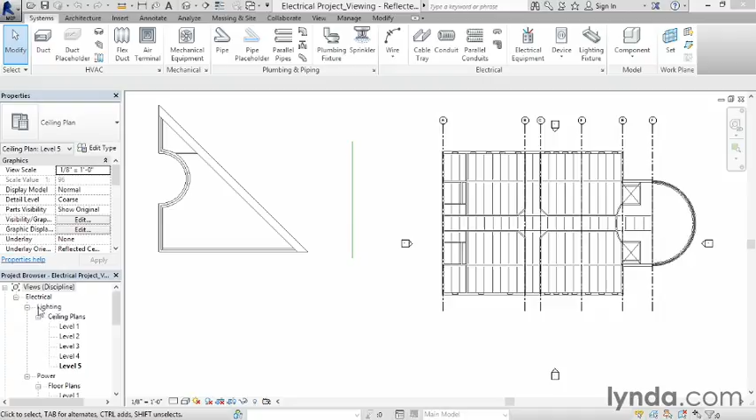If we simply don't want to see lighting fixtures in a floor plan, wouldn't it be great to just uncheck electrical fixtures in a list somewhere and have them simply go away, as opposed to some convoluted layering system? Now, let's take a look at how to control the visibility graphics of a view. The first thing I'd like to do is pick on ceiling plans. So let's go to Electrical, Lighting, Ceiling Plans. Let's go down to Level 1.

If you zoom in on an area, notice that you can see the reflected ceiling plan. This isn't really visibility graphics. This is because we told Revit to set it up as a view as a ceiling plan. What we want to do, however, is control the visibility state, meaning we don't want to see any power, we don't want to see any ductwork, we don't want to see any cable tray or pipes. So to do this, we want to control the visibility graphics of the view.

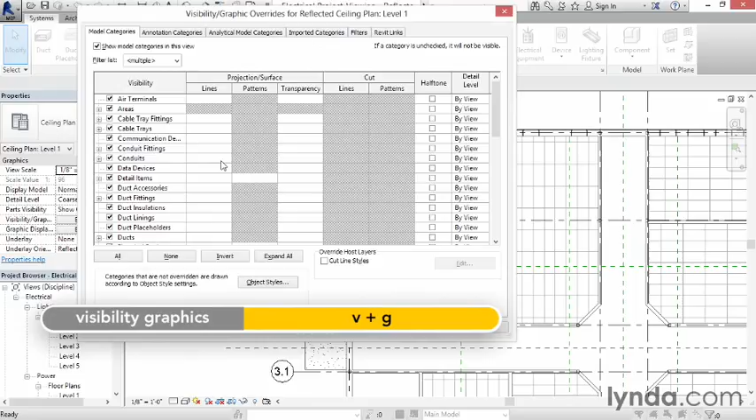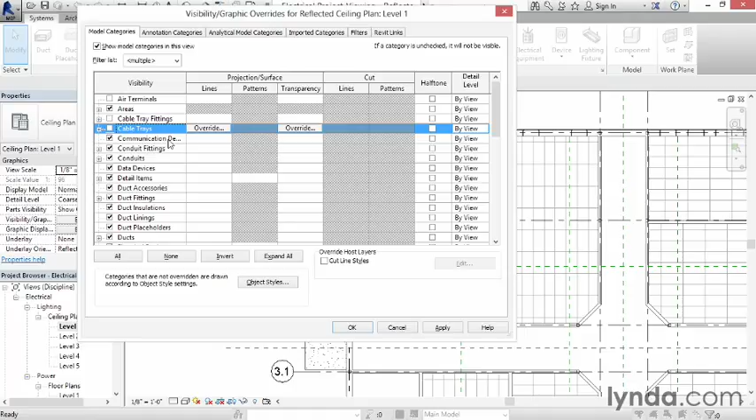Type in VG. Now, under model categories, let's make sure in our filter list, we click the drop down, and make sure mechanical, electrical, and piping are all selected. Now, let's just start unchecking items we do not want to see. Don't want to see air terminals, cable tray fittings. We'll keep communication devices. We'll get rid of conduits. We'll keep data devices. Get rid of anything that pertains to ducts. We'll keep electrical equipment in case we want to show a panel or something like that.

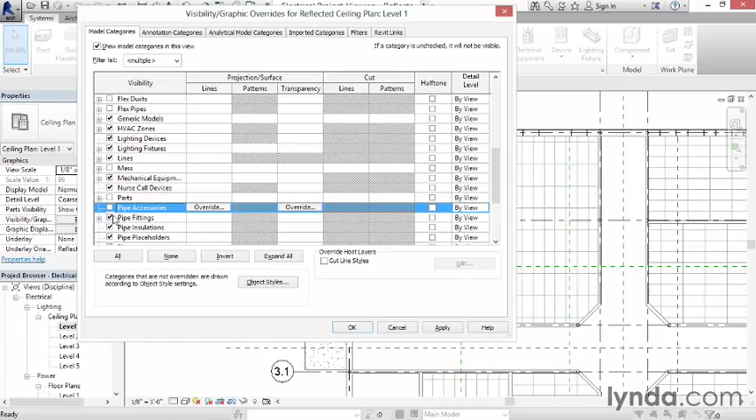We'll uncheck electrical fixtures. We'll uncheck fire alarm devices, flex ducts and pipes. We're going to definitely keep lighting devices and fixtures. We'll keep mechanical equipment in case we need to supply power to it. Uncheck pipe accessories, fittings, insulations, and placeholders, and of course pipes themselves. We could do without plumbing fixtures. We'll keep security devices, and we'll uncheck sprinklers. Of course we want to keep wires. Click Apply, and then click OK.

Now that those items are turned off, let's take a look and see how they're going to plot. If you go to the Manage tab, click on the Object Styles button. As I mentioned earlier in this video, there's no such thing as layers in Revit. So how do we control the line weights? Well, it's really simple. Air terminals, when viewed in plan or elevation, meaning projection, will have a line weight of 4. If we cut a section, it's not applicable. If we scroll down through here, you'll see that we have all of our line weights set based on how we want them to look. Either they're going to be very bold or they're going to be very light. But what do 5, 4, 1, what do these numbers actually mean?

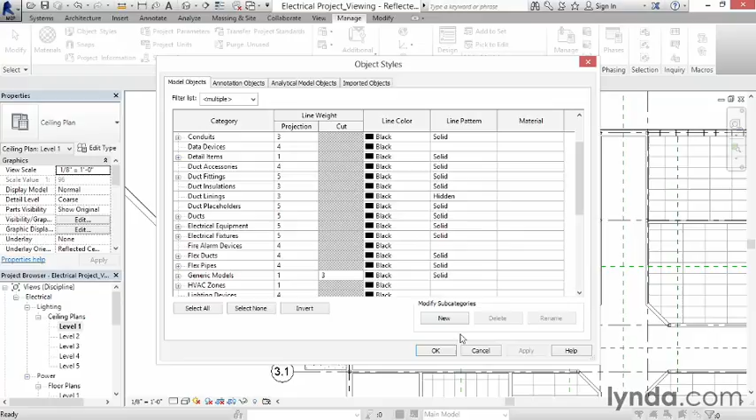Hit OK here. While still in the Manage tab, go to Additional Settings. Let's go down to Line Weights. Revit will allocate in inches a line weight for each level going down. We have 1 through 16. We can make more, but to me, 16 is more than enough. Revit's even smart enough that as the view scale reduces, so does the line weight. You get so much more control than you used to with the AutoCAD layering system. But the best part is, it really takes no effort to control the line weight whatsoever.

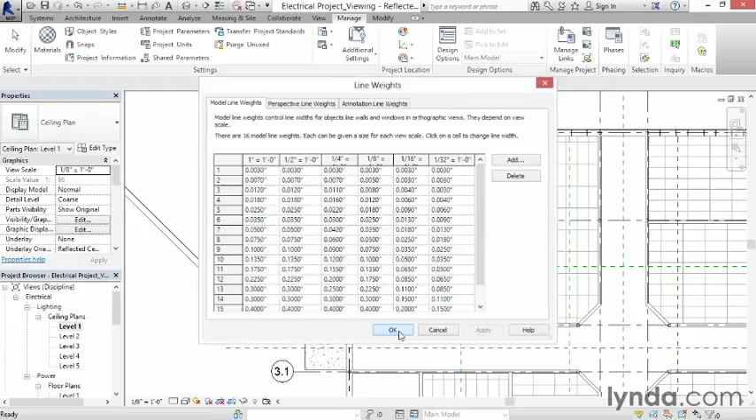Click OK. The last thing I want to show you is what's called detail level. Notice that the walls are very thin. If we click our detail level and set it to fine, you'll see that now the walls show up as walls. And any other object that we'd want to view as fine is going to show up in the view. So, a life without layers. I have found this workflow to be a tremendous advantage over the old way of doing business. Creating views that only show what we want is going to come in handy down the road.